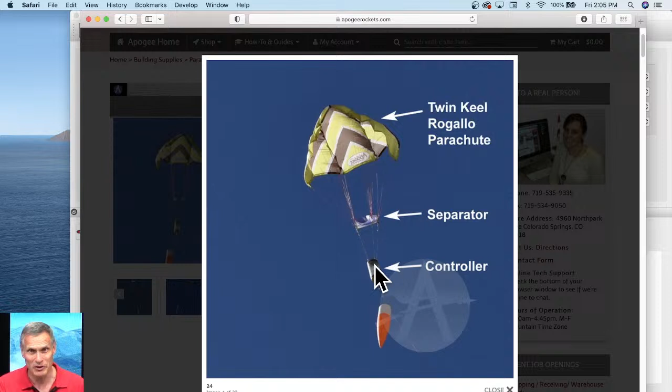How they're designated is like when I say a 24-inch parachute, the 24 inches is from the bottom to the apex point out here. This is kind of looking from the top down. Yeah. And there's 3 sizes, a 24, 28, and a 32. And I'm finding out, we have a chart on this webpage for what size you need based on how much the rocket weighs.

And I think it's a little bit light because I flew a medium-sized parachute and I almost thermaled it away. I did get it back. When they're going up, they're hard to control. You want to control them when they're coming down. So basically my rocket was too light, and it was well over 600 grams. So it was not a lightweight rocket, and so it was going up.

But anyway, so that's the big news as far as what's coming at Apogee. But we're here to talk about RockSim.

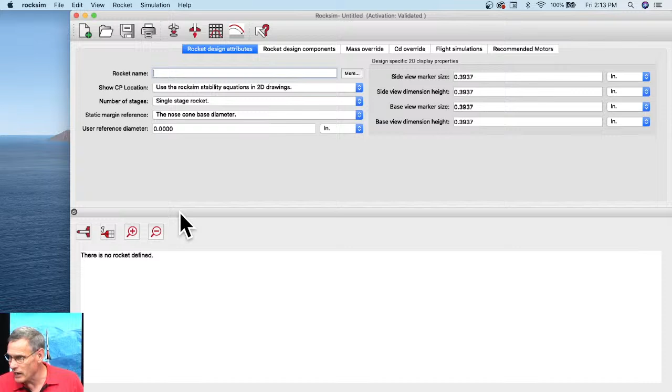Okay, so let's try this. Let's open up a RockSim design. I'm going to go to File, Open. I'll use the Research Express. Click Open there. Come on, open up. Okay, so here's the Research Express. It's a single stage rocket, but let's say this top part right here, we got a nose cone and this payload tube, and then down here we have the regular tube and the fins.

And we can see that if you click on the parts, it highlights them, and then if you go to the Rocket Design Components tab, it will highlight the part you just clicked on, and that's how I can tell that this is a payload tube. So first we have to set this up as coming down in 2 parts. Right now it's coming down as 1 part, just the sustainer. And in this body tube here, we have a parachute loaded in there. So that's our parachute right now.

So we're going to need to put in another parachute, and then we're going to need to separate it. And basically, we need to figure out a way to tell RockSim that it's going to come down in 2 pieces. Because by default, it always comes down in just 1 piece. And so we have to trick it. But it's an easy trick.

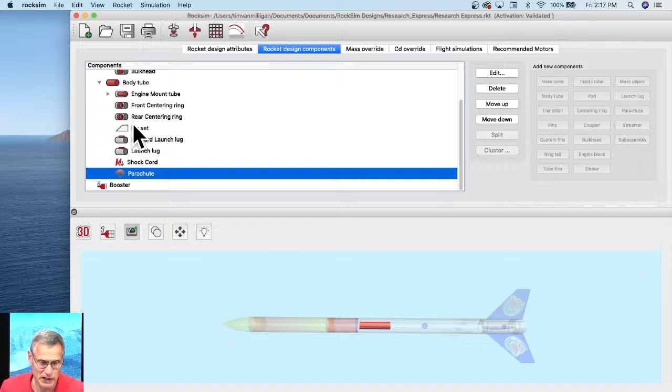So what we're going to do is we're going to take these parts here and we're just going to move them around. So I want to take everything from the bottom of this payload tube here, so from here backwards, and then I want to put that in the booster section. So I can do that pretty easy just doing a copy and paste. So I'm going to find that tube. So I'm going to click on it, and it found the tube here.

So I'm going to click on the tube here, and now I can either go to the edit menu and do a copy from here, or with my mouse, I can do a right click on the right hand button of the mouse, and it brings up this menu, and I can do a copy. So I'm going to copy all these components, and I'm going to delete them, but I don't want to delete them until I've pasted them somewhere else. I'll just come back and delete them in here in a second.

So now I want to paste them onto the booster. So I have to highlight the booster and then either go back to the edit and paste, or right click on the booster. Come on. Doesn't want to let me paste there. I'll just do it here then. Paste. Okay, so now it pasted those components here on the booster, but it's not showing them here yet.

Well, that's because I'm only showing the first stage. So I'm going to click this button and then show both the first and the second stage. And so now you see there's new components here. So let me zoom out a little bit. So now you can see we got a first and a second stage. So now these components here are redundant. So I'm going to go back and delete those.

And so that was this body tube right there. And I'm going to do a delete over here, or I can do a right click and cut or delete. The difference between a cut and a delete is a cut will copy them into the clipboard, where a delete just deletes them. So you don't copy them. So I'm going to just hit delete. It's going to ask, do I really want to delete? And I'm going to say yes. So when I do that, now it looks like we're back to the original rocket, which is what we wanted. But it's actually set up as a two-stage rocket.

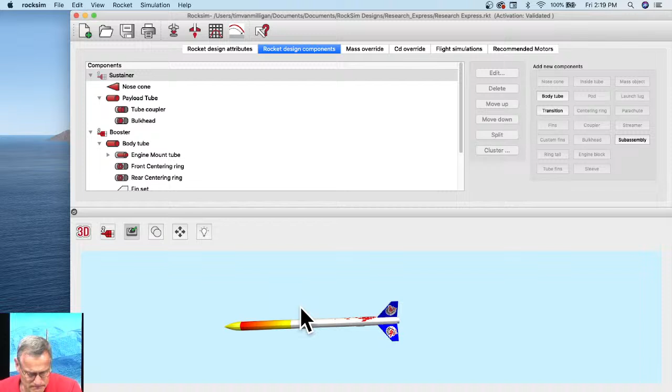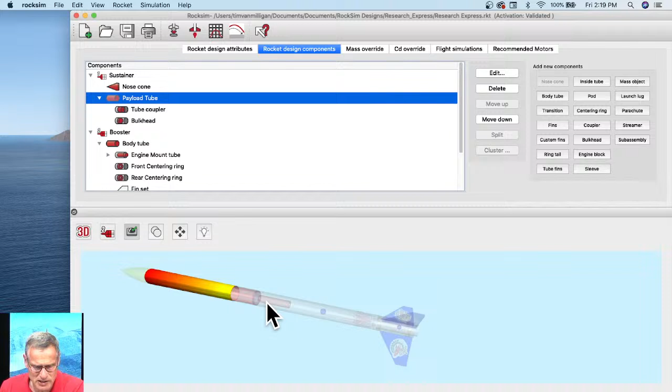Okay, so now we've got one more trick to do. Well, first we need a parachute in here. So I'm going to put a parachute into the payload bay, but I'm actually going to put it right next to this other one here, because its weight on the way up is going to be down here. So I'm going to put in a parachute.

And I'll just put in an 18-inch parachute part. And it's not showing the parachute. Well, actually, I'm pretty sure the parachute's on the inside. So if we just look at a 2D, we can see the parachute right here. So now we need to change the location, but I want to put it in the booster stage.

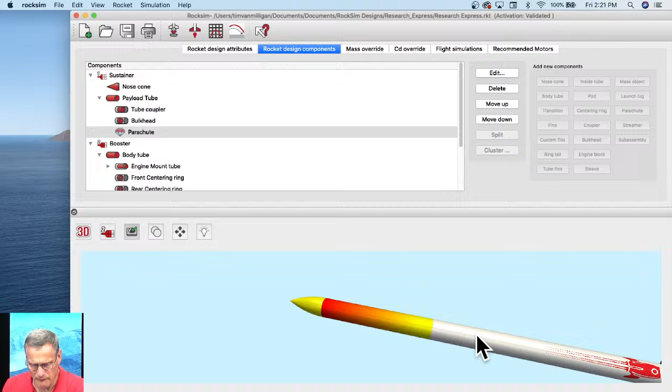Okay, so I put it right there, right about where we wanted it. That's good. And we'll click OK. So now we've got a parachute in both stages. Can't see my parachute. Let me click on here. There it is. So there's the parachute for the upper stage.

All right, so now to run this as a simulation as a two-stage rocket, RockSim needs to know when the two parts are going to separate. And we do that with the delay and the ejection charge of the booster motor. But we may also need a motor in the upper stage, but we don't want it to be a real motor. We want it to be a fake. We're just going to trick it into thinking there's a motor in there. And that allows it to track the trajectory of the rocket.

So let's first try to run a simulation just as it is and see how it's set up. So first I'm going to do a save as. I'm going to save this to my desktop just so I don't lose it. Okay, so it's on my desktop. Okay, so now we're going to go to prepare for launch, which is this button right up here. Click on that.

It says in order to run simulations, at least one body tube in each stage needs to be designated as a motor mount. So I need to designate a tube in the upper stage as a motor mount. So I'm going to say yes here. And I have a payload tube, a body tube, and an engine mount tube in this rocket. And I think we're going to use that payload tube, which was this one up here. And we'll click OK.

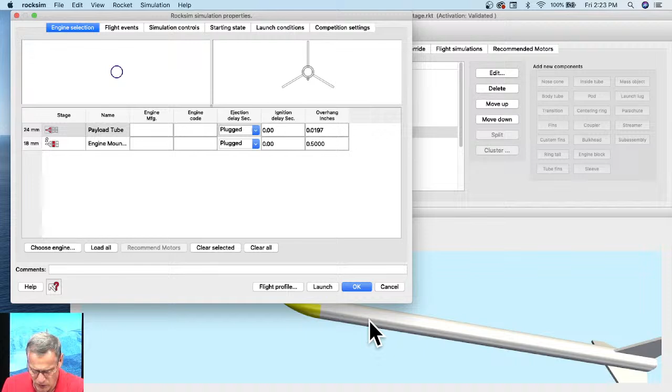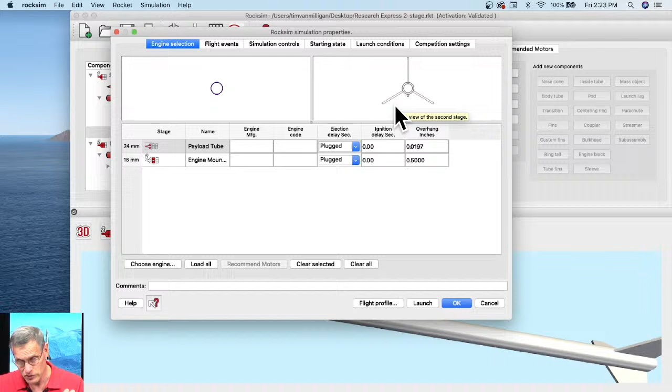Okay, so now it's looking for motors in the rocket. And you might notice that we lost our decals right here. And I think we lost them because when I saved it to the desktop, I lost the link to the decals, because now they're no longer associated with this rocket. They're associated with the old name. So the decals had the name Research Express, whereas this new one is Research Express 2-stage. So we changed the names, so I lost my decals. So don't get too hung up about that.

So right now, here's our booster stage. Let's put a C6-5 motor in that. So here's the C6-5. Click OK. So it's loaded in the booster stage. The upper stage doesn't have anything right now. Let's go to the flight events. Okay, so the booster stage has a parachute and the sustainer has a parachute.

So right now the booster stage is set at stage separation. So right now it's set up with the C6-5. Stage separation occurs at 5 seconds after the motor burns out, which is what we want, because on a single stage rocket, that's where it would be, like a C6-5.

And so now the parachute for the sustainer is also set to deploy at maximum ejection delay, but I don't have a motor in it, so we can't use that because it's going to look for a motor delay. So let's set it at deploy at apogee, and let's see what happens. I'm not sure what's going to happen, but we'll take a look.

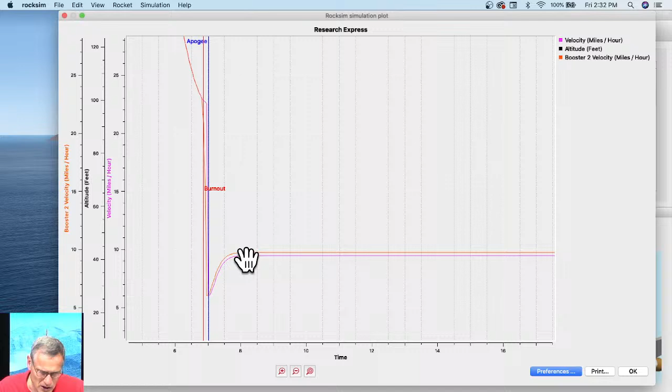I have to really zoom in to see that there's a difference between the velocity for this booster and the velocity for the sustainer, because they both have parachutes and they must be close enough in size that they're getting the same descent rate.

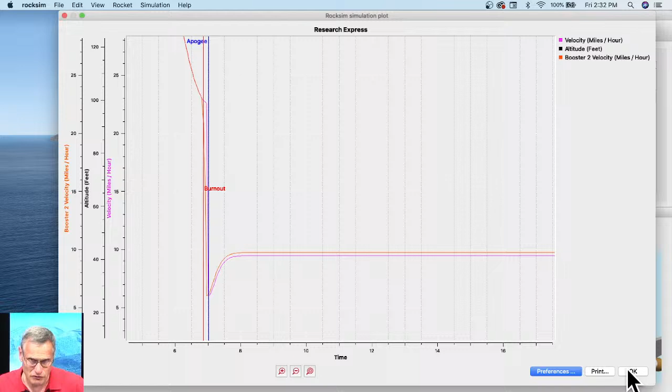So we want to know, can we improve the accuracy? Well, first we need to know what the descent rate is of this upper stage with its current parachute, and then we need to actually make some drop tests to figure out what the true drop speed is, and then adjust the size of the parachute to match that drop rate. So let's say I did that.

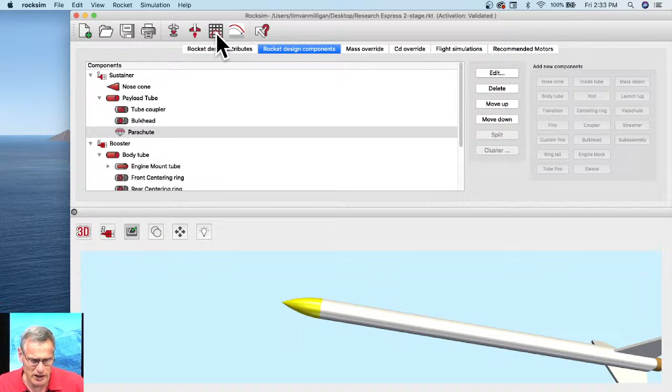So you would get the current drop rate from this graph right here, the velocity graph, and that is this line, the pink line. So we're dropping around 9 miles per hour. I'm looking at the pink line, and it intersects right here. It's just a hair under 9 miles an hour. The booster stage, which is the fins, falls a little bit faster. It's about 9.5 miles per hour. Okay, so now I know the drop rate of the sustainer.

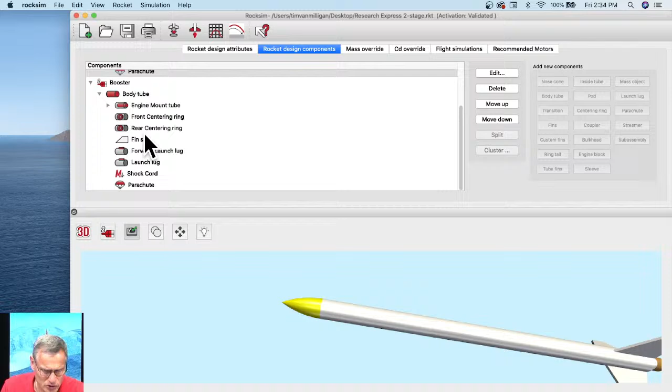So let's say that it was actually coming down faster at 15 miles an hour. So 15 would be way up here. So I need to shrink my parachute down. So I am going to go to the parachute. See, this parachute's the booster stage parachute. So I'm going to change the name to booster stage parachute so we can tell them apart more easily. And this one here is the sustainer stage parachute.

So we had it set at 18-inch diameter, 17.99. Let's make that like 8 inches in diameter. And I didn't see if anything changed. Let me change this back to 18. What I'm looking for is the descent rate. So at 18, hit tab, we have 7.1 miles per hour. And at 8, it jumped all the way up to 15, which is pretty close. That's a little bit too fast. That's almost 16, so it needs to be a little bit bigger.

So we'll go 9 inches, hit tab. Now we're a little bit too slow. So maybe it's like 8.5 inches in diameter. Yeah, it's pretty close. Click OK. And so now if we run this simulation again, this upper part should fall a lot faster. So let's go to prepare for launch again and flight profile.

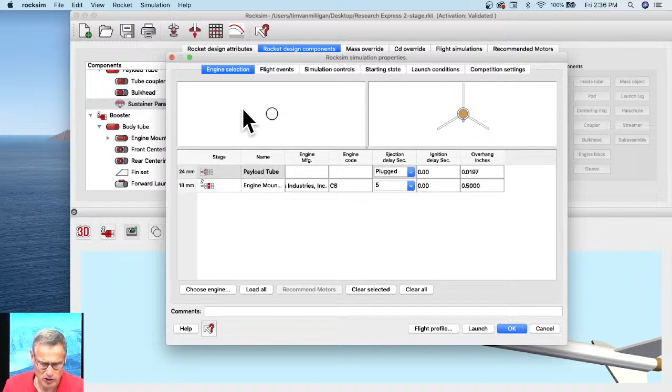And we're basically doing that same simulation, and we got the same altitude, but this time the upper part should land a lot faster. And I'm just going to speed things along by grabbing the slider bar. Okay, so now you can see, here's that upper part of the rocket, and indeed it is falling a lot faster than the booster part. And so this is already landed. The booster part is still going down, and it's going to take a lot longer.

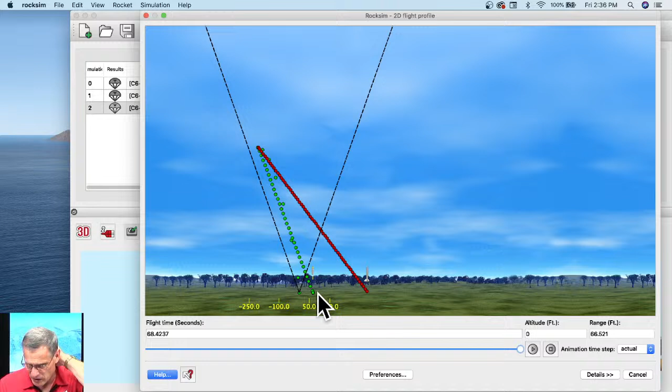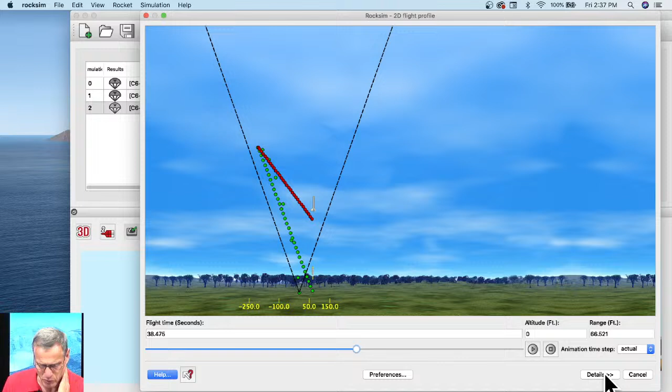So now we need to find out, when does that one hit the ground? Well, there's 2 ways to do it. One is you can just use the slider bar and get an approximation. So right there is when it stopped moving. So that's about 38.475 seconds. If I click on the details here, I can look at my velocity. Right here it says 0 miles per hour because it's already touched down on the ground.

So if I back it up until where there's actually velocity, right now at 38.04 seconds, we still have velocity at 16 miles. And then at 38.1, 38.2, we drop down to 0. So I would say that's my time that it took the sustainer stage to land.

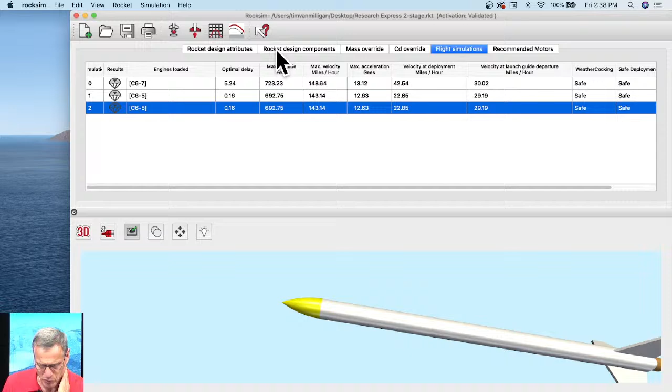But all of a sudden there's a lot more questions. How do you get an accurate descent time for the payload? Well, you can use RockSim to get an approximation like we did. So if I go to the sustainer parachute, the way I have it set up now, with this diameter and that mass, which should be the mass of this part right here, that should be the descent rate right here. It's 15.03. We're close. In actuality, it was going down a little bit faster.

But this is just an approximation until you actually run the simulation. So I can get an approximation of the descent rate right here. And if I needed to be more accurate, I'm going to need to do drop tests. Take the parachute up to a high level with a stopwatch and a known distance, and drop it and measure how long it takes to get to the ground.

Divide the altitude that you dropped it from by the time, and that will give you a descent rate in feet per second, or whatever units you're using, and you can do the conversion to get it to miles per hour. Or you can come over here and say, what's that in feet per second? That's 22 feet per second.

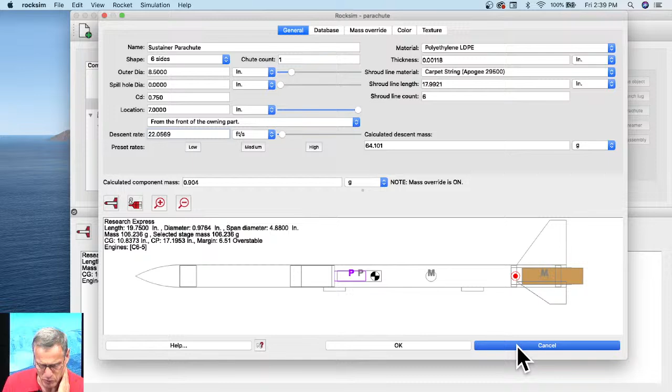So hopefully, Art, that answered your question. That was a really good question. Let's see what else we got here.

Low budget Bob: I have a few RockSim files, but they show no motor recommendations. How do you add or figure out what motors are right? And he says the rocket he works on, the Nuke Pro Max, is one of the files. So let's go to the Apogee website. Type in Nuke. I think that's one that we sell. Nuke Pro Max. There it is right there.

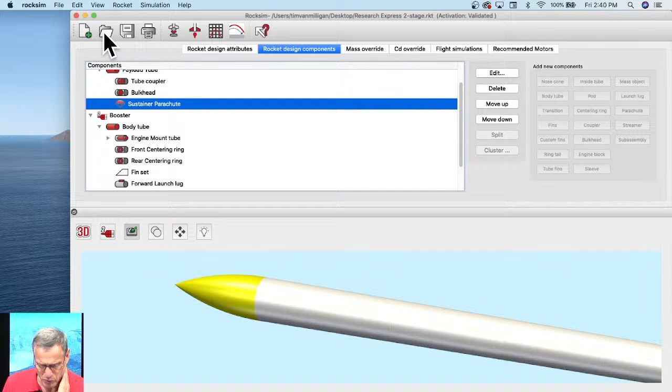So this is the file. This is what the rocket looks like. That's how big it is. And if you go down here to RockSim file, you can download it. But I believe it's already in the database of RockSim since that's an older kit. So if I go to file and RockSim designs. Let me sort this by,

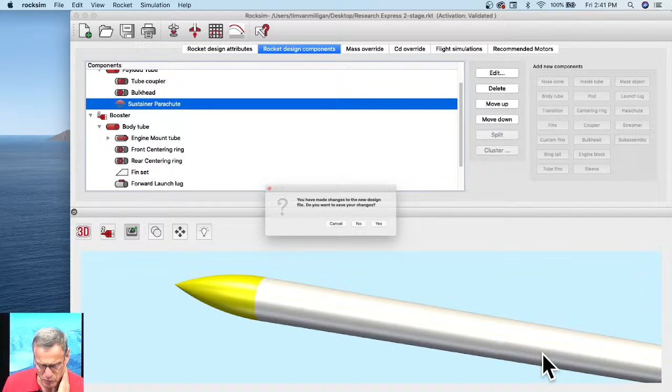I'm looking for a LOC Nuke Pro Max. It's not in there, but that doesn't mean it's not there. Let me go to my Rocket Applications folder. RockSim 10.5. In the design folder, look under LOC Precision. Okay, so here it is, Nuke Pro Max. Click open. Save that one. Sure, we'll save that. Okay, so here's the Nuke Pro Max.

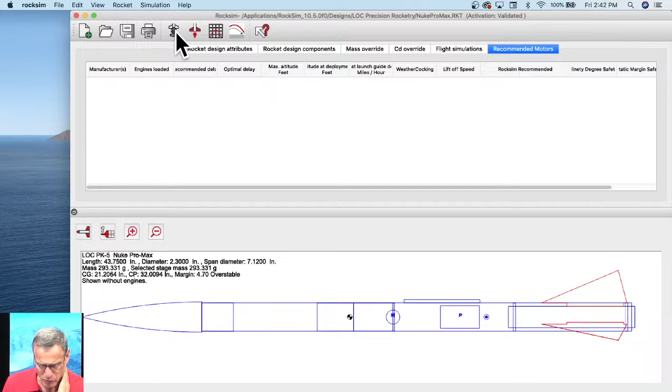And the question was, he doesn't have any recommended motors right here. So under flight simulation, there's some motors, but there's no recommended motors. So here's an easy way to find out the recommended motors. You go to prepare for launch. When you do that, there's a button here called recommend motors.

You click on that. And what it's going to do is it's going to go in the database and run simulations for every motor in the database that we specify. And then it's going to do some checks on that and pick out the ones that are recommended. So I forget what diameter this is, 38 millimeter in diameter.

So in 38 millimeter motors, there's probably over 100 different rocket motors, or a lot. And I don't want to run them all, so I'm going to sort them by manufacturer. So I'm going to use only the Aerotech motors. Instead of Aerotech and Cesaroni and Hypertek and Gorilla and Contrail, just Aerotech. And I'm going to say all the motors from Aerotech.

This is a longer rocket, so I'm going to change the launch guide to a 6-foot long launch rod. And I'm going to use these weather conditions right here, 700-foot altitude and an 8-mile-an-hour wind. So that's a pretty good wind. And then we're going to use those recommended conditions and just click use those.

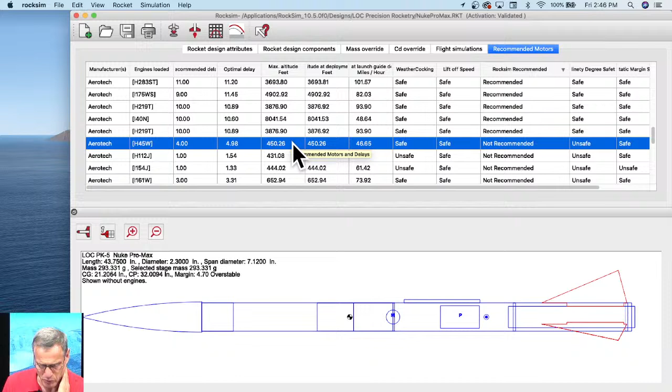Let's go see what some of these not recommended ones are. An H45. This one also says it went unstable. It could be depending on the weather conditions. You know, in lower wind speed, that might be a recommended motor, but in an 8-mile-an-hour wind speed, it says probably should stay away from that one.

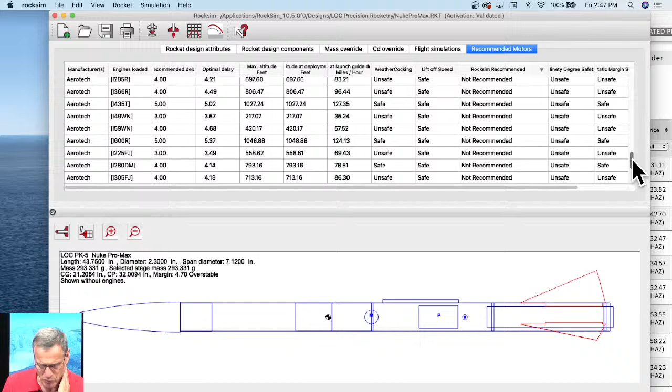Yeah, and you can take a look at them. What you can do is select the motor. Let me select that one that went not recommended, and then do a right click and say load engines, and it will load the H45 in there. And then let's see what happens when we launch it. So parachute deployed at apogee. Yeah, let's just do that.

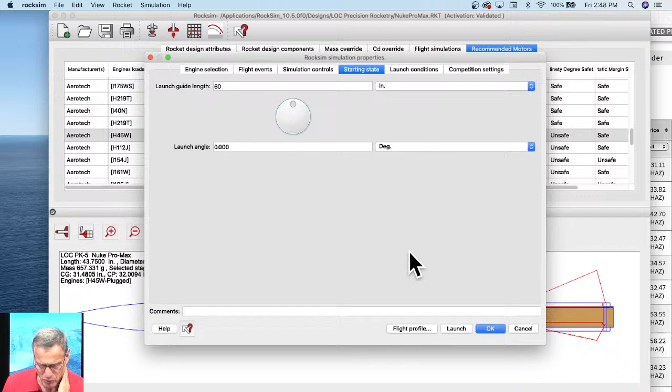Simulation, starting state. I think we had this at 60 inches. Launching straight up. Let's see the flight profile. Let's see what happens. Yeah, it didn't go very well. Didn't go very fast. But it went a lot higher. Yeah, so that went mostly okay.

It's just for some reason when it ran that recommended motor, it didn't like it. For some reason it thought it went unstable. Although here it's showing it as nice and stable. I really like that one because it went high and straight. Looks pretty good.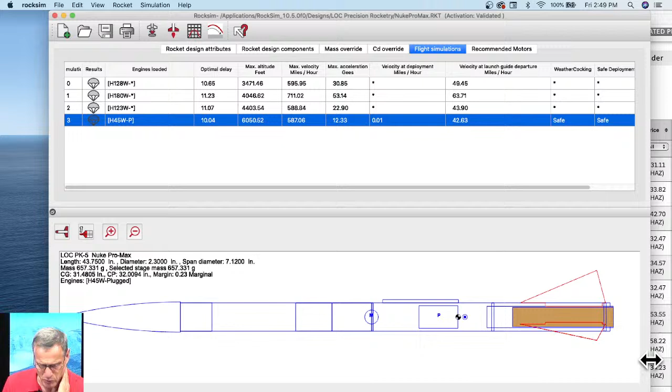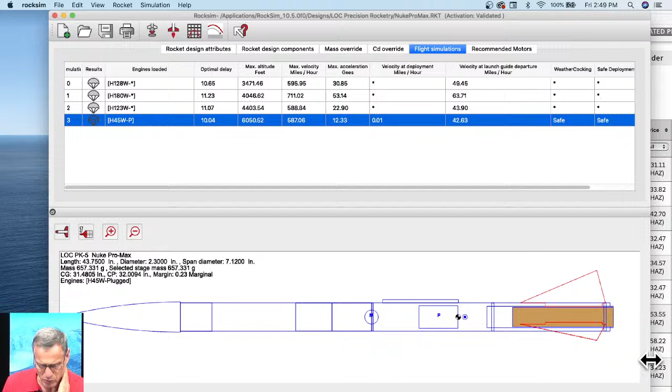So other questions. Carlos says, I am playing around with making photo etch parts. It is hard. In RockSim, imagine a 13mm rocket with an elliptical photo etch fin. What material, or do I just weigh them? Photo etch. Are you photo etching them out of plastic or copper or what? I would choose whatever material you're using.

So if you go to the fin and you go to edit the fin, right up here we have material. So if it was a plastic, I would choose maybe a plastic down here like polystyrene or polycarbonate, cellulose acetate. I have no idea what that is. But if it was a copper, you know, when I think of photo etching, I'm thinking like printed circuit boards, and those were always copper.

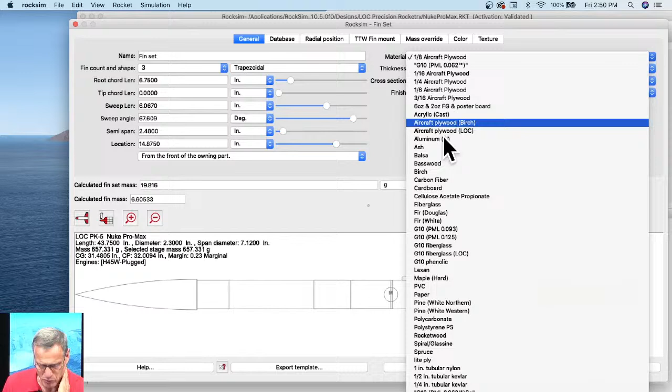You would have to add copper to the material database, and to do that, you go to the Rocket menu, go to Edit Database, Edit Materials, and then scroll through the list and see if copper is in here. There it is, copper, rolled copper. And then you have to tell it, okay, I can use this for fins. So here's the fin set column right here, and you have to change the 0 to a 1.

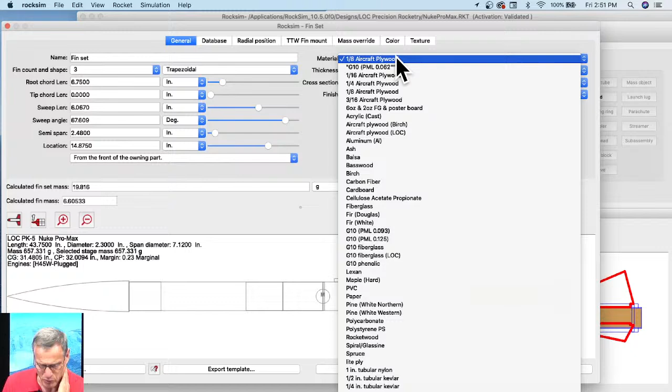So copper, edit, and then check the fin right there, and then done. And it changed it from a 0 to 1, and I go OK. And now if I come back to the fin set, I should see copper as an item. I'm not seeing copper as an item. It should show up here.

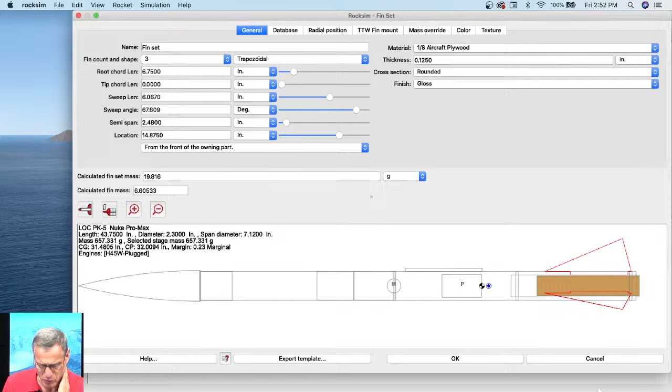Material. Just making sure it's not in the list somewhere that I'm not seeing. Okay, so why isn't that showing? Let's go back up here. Oops, cancel. Go to Rocket. Edit database, materials. Go back to the copper. Copper. That was rolled copper. Fin set. It is marked.

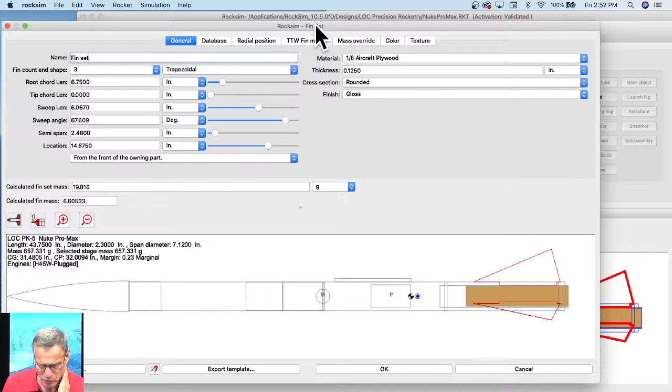That should be good. Let's mark it as body tube as well. Done. Click OK. Still not seeing it. Sometimes it puts things at the bottom, but I'm not seeing it down there either. I wonder if restarting will take care of it. Or closing this out. Let's open up a new Rocket.

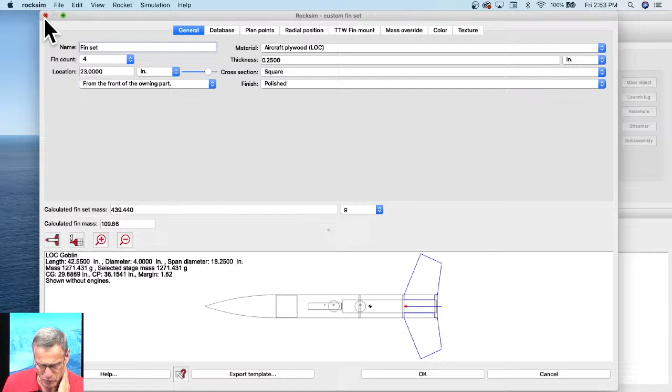LOC Goblin. Save changes? No. Fin set. Material. Not there. Not down there. Let's cancel this. Save changes? No. I'm going to restart RockSim. Quit RockSim. Save my changes? No. Restart it while we're waiting.

Floost says, hey Tim, I'm launching a rocket tomorrow. I'm not sure if my rail buttons are too close together. Will that be a problem? Typically no. The purpose of the buttons is to keep the rocket from rotating. So as long as it will slide along the rail easily, it should be fine.

But usually the closer the buttons are together, the rocket might want to wiggle a little bit, and if it wiggles too much, it might lock itself into the rail, and then it doesn't want to move. So as long as it slides freely, I think you'll be fine.

Fatbank says, how do you design the universal rail guides in RockSim? I would use a launch lug, just a regular launch lug. And then if you want to account for the extra drag, you just make your launch lug bigger in diameter.

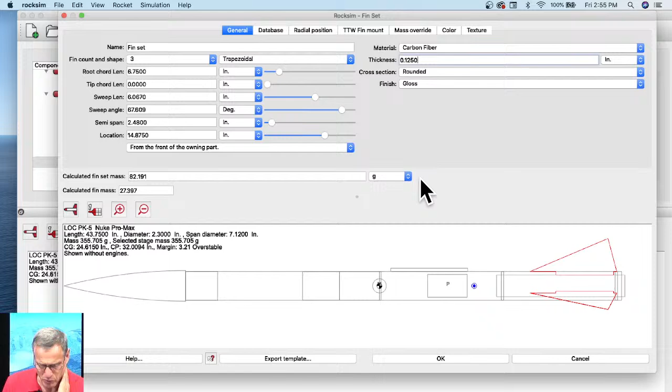Let me go back to here, see if restarting took care of any of the problems. Pro Max. It's still not seeing it. I have to try to figure that one out. Should be able to edit the database just fine. Okay. Anyway, let's see what we got going on here.

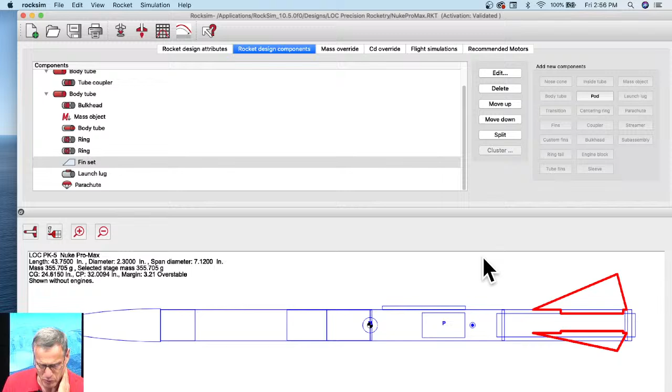Must be as close to 45 seconds as possible. So Art is still talking about the parachute descent. He's trying to get his upper stage to land at 45 seconds. Let's, I saved that one on my desktop. Let's open it up in the launch visualizer. New window. And we'll go to the RockSim.com website, and this is where the launch visualizer is.

Let me log in as soon as it's done loading. Okay. All right, so it's done loading. Uploaded new design, and we're going to upload the one we just created with the two-stage. It was on my desktop. And let me do it by date modified. Research Express two-stage, click open, upload it.

Okay, so there's the rocket sitting on the pad, and there's the separation line. We need to choose a launch site. So Art is somewhere in Texas, so why is it? There we go. Let's put in the word Texas. Tripoli, Northern Texas. Click OK. So we're going to choose a launch pad that's closer to Art. I don't know where this is. Might be Amarillo. As soon as it's done loading.

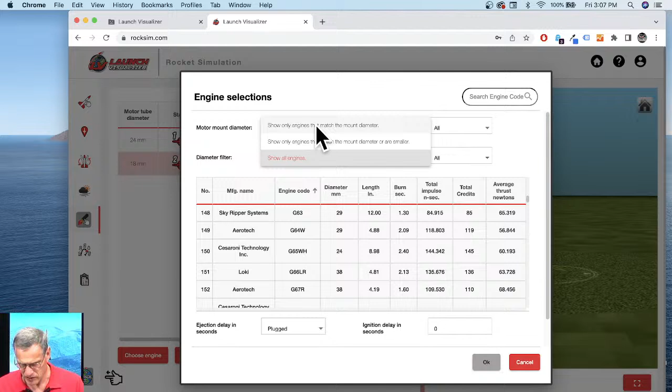Choose an engine. I'm trying to run this as fast as possible. We won't be able to launch from Texas anymore because it's just taking too long. Maybe it's my internet connection. Wait for it. There it is. It's showing all engines. I only want to show the 18s. Come on, I clicked on it. Just waiting for it. There it goes. Okay.

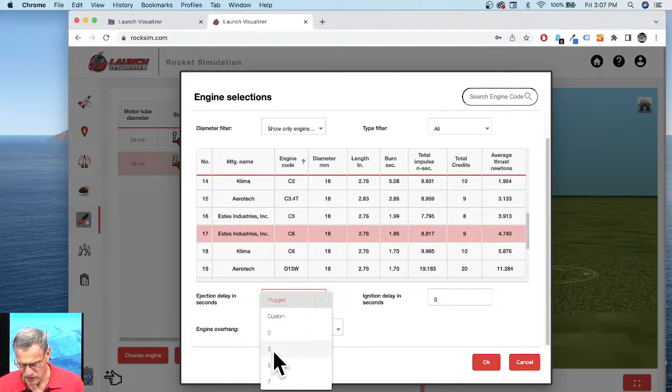Here's this, the C6. Make it a 5. Click OK. Go back to the parachutes. This one has to be deployed at apogee. Now I think I can launch. Let's see what happens. Simulate. Is it going to show up? It's like it didn't run the simulation because this was a 2-stage, so it should show 2 engines loaded. So something's going on with the website. I have to check with the programmers, see what's going on. Why is it so slow?

So I guess we've gone over an hour, so we'll have to conclude this, hopefully. Yeah, everything's like froze up. Yeah, it's like my picture is not moving anymore. All right, well, there's me. Okay, hopefully next time it'll work better. Something's going on with technology today. There's a bunch of gremlins inside the computer that are doing weird things.